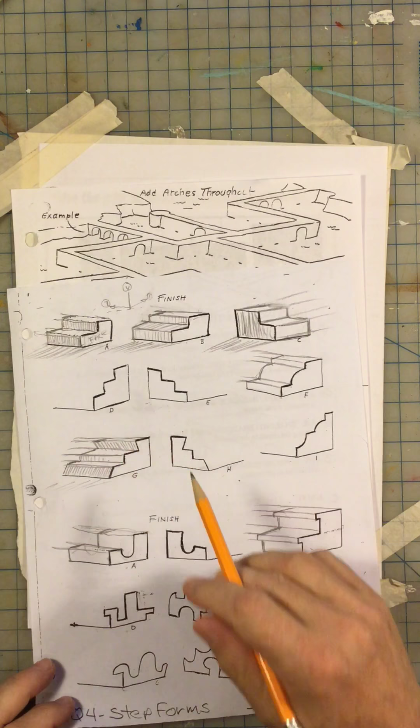And then we went from the letter shapes and the flags, and then we went to the step shapes that look like this, working the same thing. Each one gets a little bit harder. We're going to go ahead and twist this up a little bit. Again, it's dealing with relationships.

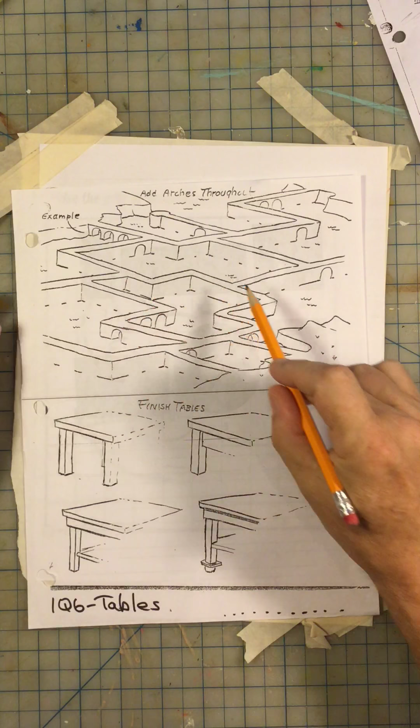And this first one up here is all about making arches. What this is exactly, I'm not really sure. You can create anything you want in your mind. But what I want you to do with this is about adding thickness and understanding how that's going to sort of lay out. If you look at it, check out the baselines of the actual object here, okay?

There's always going to be these little breaks. Everywhere where there is a break in the baseline, you're going to make an arch or an oval, half of an oval that looks kind of like this, okay? Just something in there like that.

I find, and you figured me out by now, is I like to do all my like things at one time. So I would go through the entire thing and I would do every arch or every opening. Now, that in itself is not very hard to do.

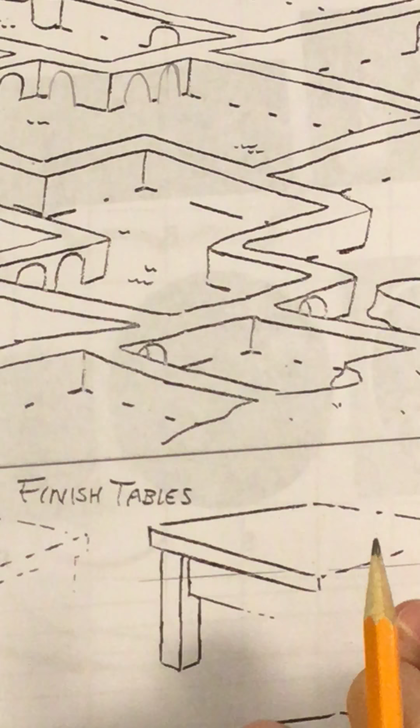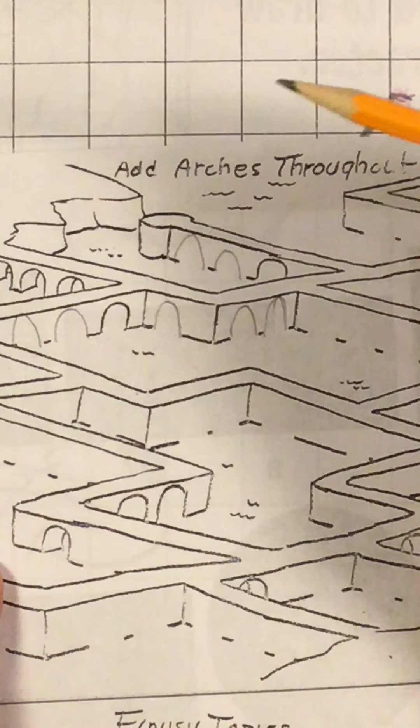This, in essence, is the actual real issue here, and it goes kind of like this here. Let me zoom in a little bit so it kind of looks like this here. Now there is a trick to this, just like there is everything. Once you get all the different arches placed in there, and they don't have to be perfect by any means. I think there's about 50 arches in here, and that's how we're going to grade them point-wise.

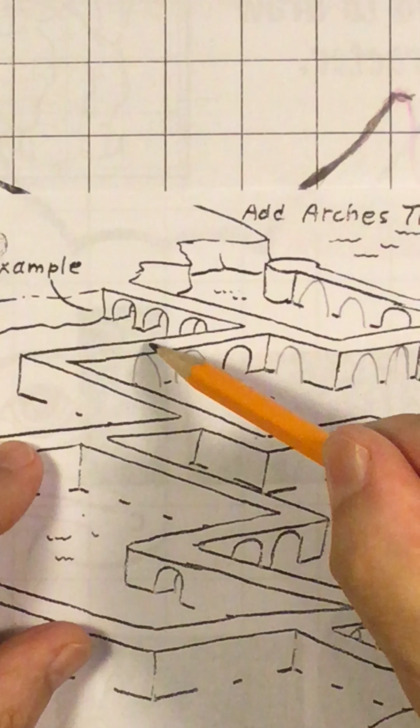But the big trick here is putting in the thickness. That's these little additions in here, heading off to either in direction 1 or in direction 7, and I'm going to show you how to do that.

What you want to do is look at the baseline, again the baseline of the arch. You're going to notice that on this baseline, the left hand side of this arch is actually lower than the right hand side, which is a little bit higher. So this is on a direction 1 line. So what you're always going to do is do the opposite of direction 1, which is direction 7. And then whatever the front does, the back does it. So that's how we create this concept of thickness or arch.

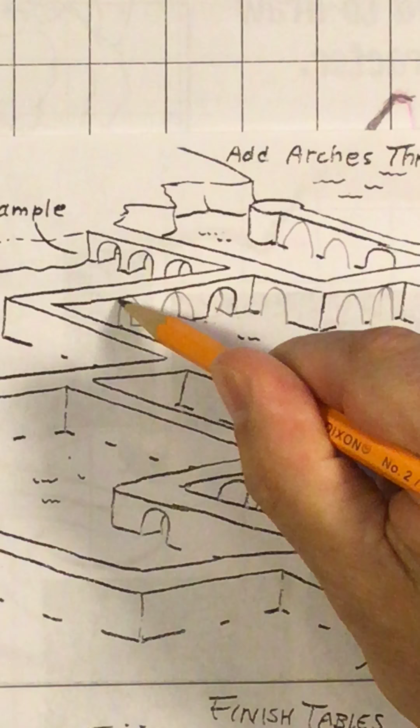Like things to like things, and since these are all side by side, they're going to kind of do the same exact thing. So you're going to add the thicknesses on the top side or the right hand side of the arch. Now, like everything, it's not always that easy.

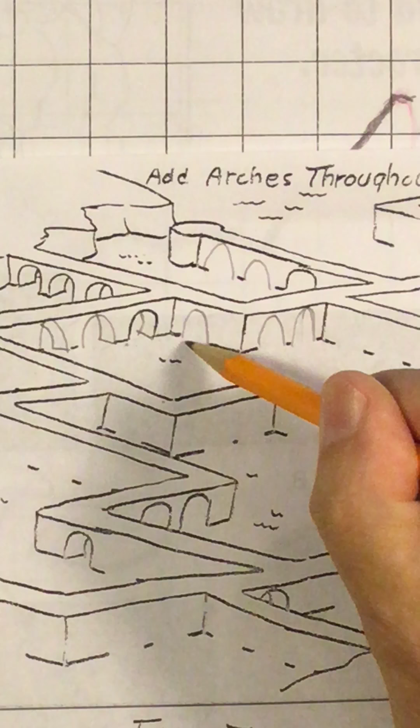We're going to jump over to the other side here. Look at this one here. It's different. It's still arch. Look at the baseline. Baseline is a direction 7 line. So that means the thickness is going to be a direction 1 line, the opposite, or the inversion.

So we're going to follow the same process. Which one's higher, this corner or that corner? And you're going to all agree that this one here is actually higher. So that's the side that gets the thickness.

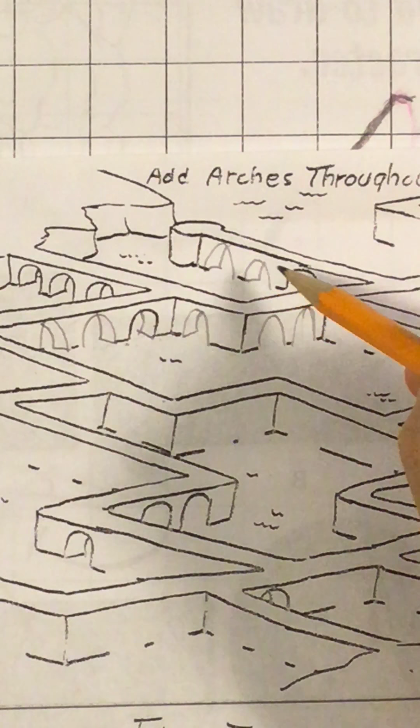So what you're going to do is run through all of these arches, and you're going to make a determination which side the thickness goes on - it's up to you to make that decision. There's about 50 of them in here. Take your time, make sure you go ahead and get all of them. It's a nice little trick for training your mind to start seeing things a little bit differently.

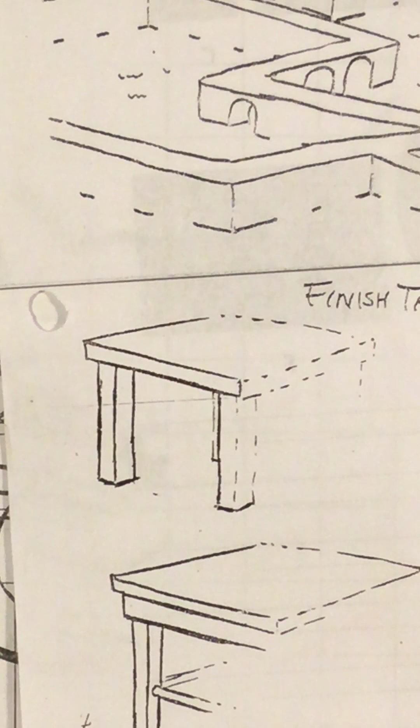Let's go to the bottom part here - this shouldn't take too hard. This is basically relationships, but of a little bit different type. We've done relationships from top to bottom and from the front and back. This relationship on these tables is basically comparing the left side of the object, sort of like the symmetrical drawings we were doing last week. Compare the left side to the right side. It's all about seeing relationships.

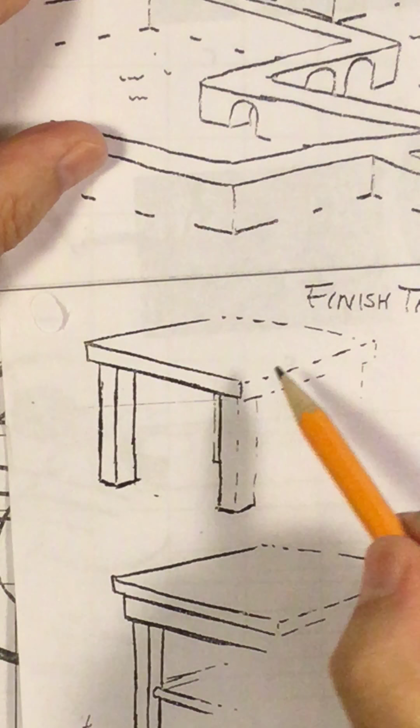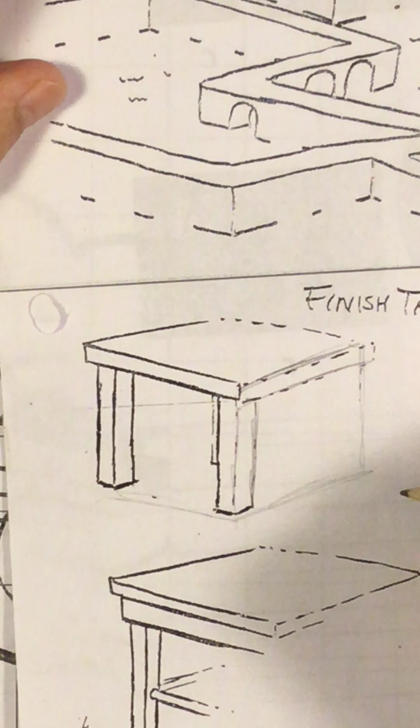Some things you need to look for - okay, look at what's happening here on the left corner of the table. We have this overhang, right? So I'll want to make sure I create that overhang on this side. And then we're going to place the leg in, kind of like this - easy enough to do. Again, you can go back and shade and shadow, make sure you get that all done. I'm not going to waste time doing this here, so you should be able to figure it out.

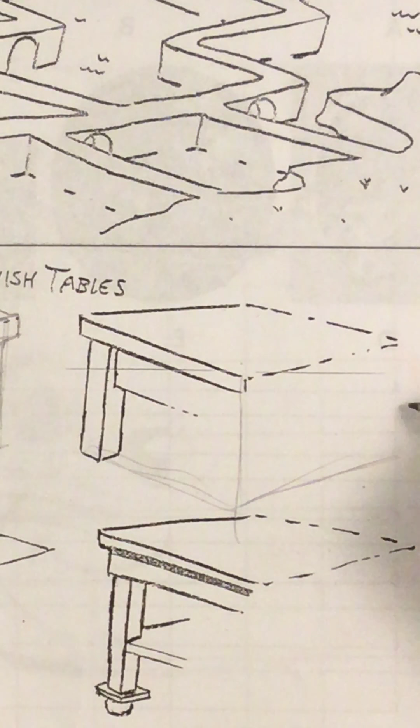Let's go to this next table here. This one is the same simple thing - I'm going to start off the same way, creating the big shape or big form. When you look at it, you can obviously see all of these are just going to be cubes. I know what the cube generally is going to be at. And then what I'm going to do is follow the rule of relationship, which is a little bit different - it's a little bit harder.

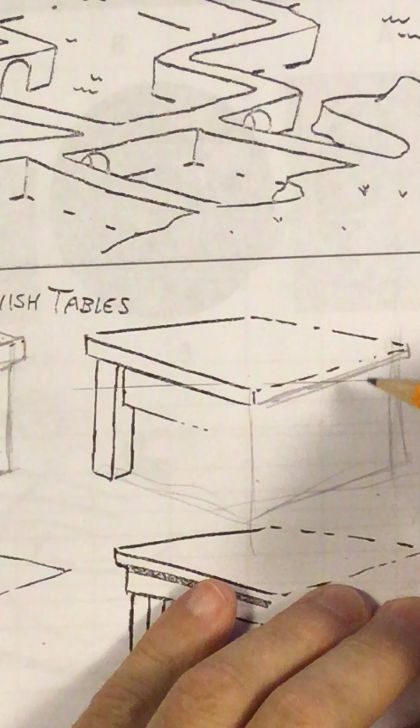We're going to add thickness here, and then put a leg here just like we did on the first one, and a leg on the back one, kind of like this. But this is going to be a little bit different - whatever the left-hand side does, the right-hand side does the same thing, but the opposite. So we're going to add its thicknesses. But then look what's happening right over here - this is a little bit different, all right? So we're going to go ahead and figure that out.

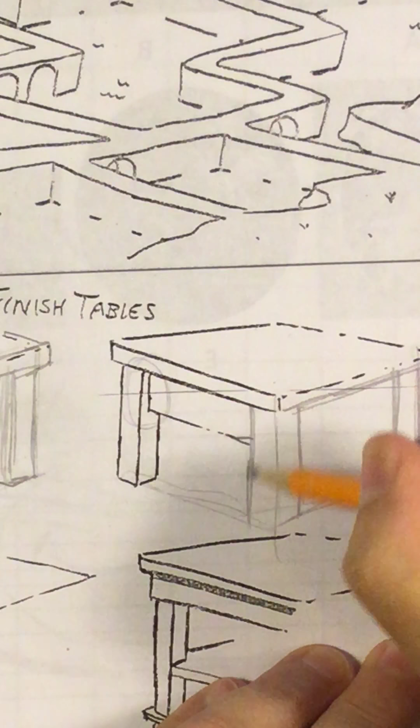Let's do this middle leg. This comes over - you can't see it because it goes behind the leg. And then it pops out over here, and it goes into the side of this leg, and then comes down like this here. All right? Shade and shadow, figure it all out, all right?

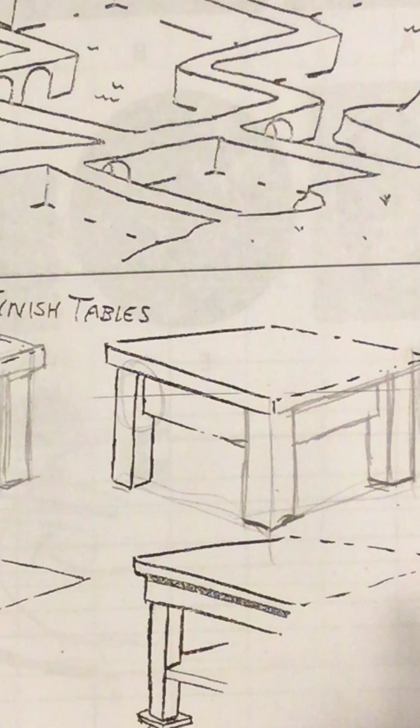Now, that's the general idea - sort of work your way through, keeping this up. Don't forget to darken in your baselines, making these a little bit different with a bit of line variance, shade and shadow. So you can see how this little game is going to be played, all right? Each table gets harder and harder to do, and again, it's a challenge to figure out whether or not you can figure out what the puzzle is.

Again, do the best you can - that's what we're looking for, and we'll see how you do when I look at these later on.